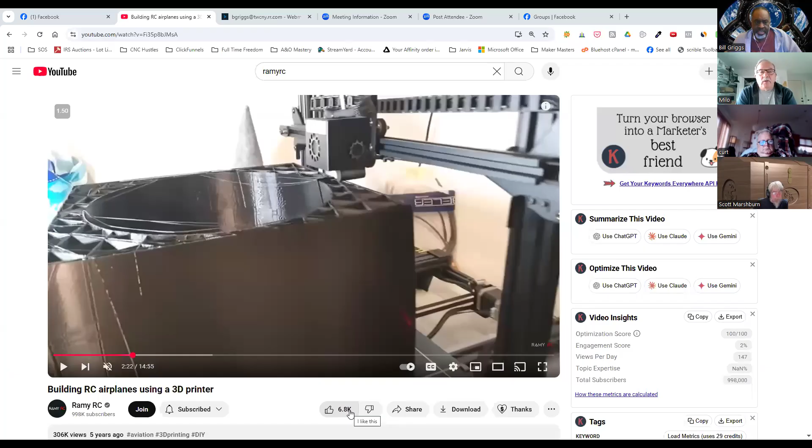This is a guy whose videos I really enjoy watching. This one is from a few years ago when he first started doing this. Can you see the screen? Yes, I can see it.

So he's using a 3D printer. We don't need to listen to this part, I sped it up, by the way.

So what he's printing is a mold for a nose cone of a jet.

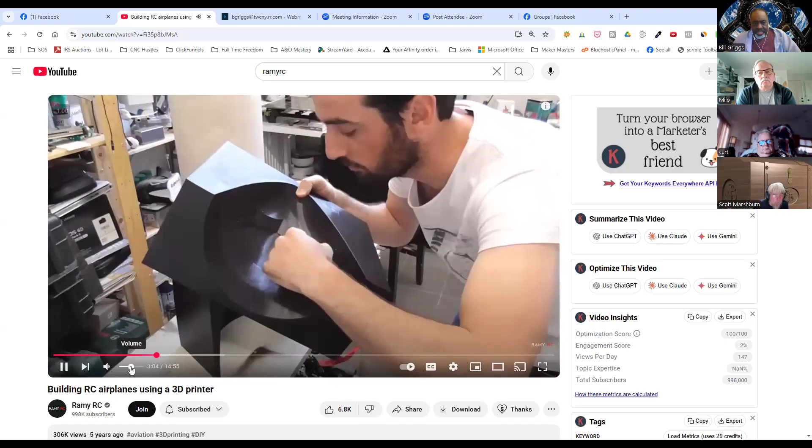So now I have the two pieces, the first one, and this is the nose. As you can see in the windows here, we have some work to do. I have to add some filler and sanding, because we only had a 2-dimensional picture, and it was really hard to construct, especially the windows, because the front two windows are straight, not curved with the fuselage, except the one on the sides. My friend Ralph really did his best, and they look amazing. He got the exact shape, but he couldn't avoid these because they're really hard to do.

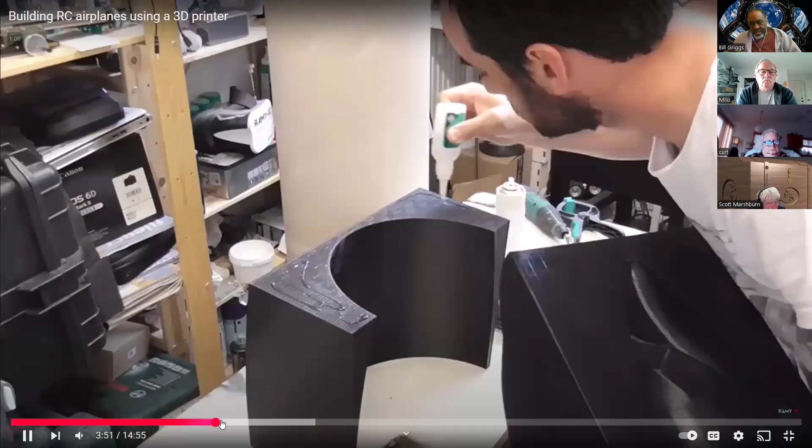So we thought we could do some filler work here. I'm going to go forward to where he gets further along in the process, and then a little further.

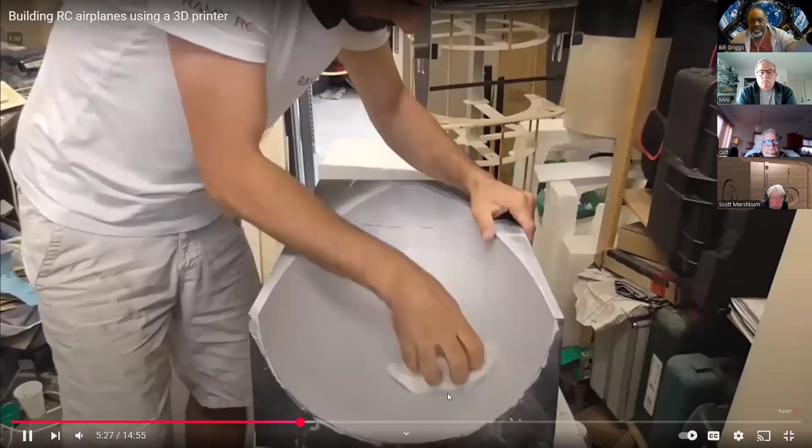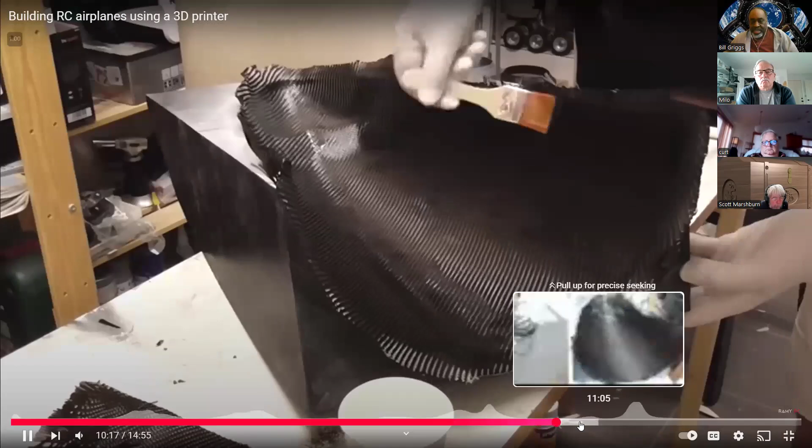So he gets to the point where he's got a fiberglass mold. We've all seen people make things like Corvette body replacements with a fiberglass mold, but this is what he did with his 3D printer on a large scale. After he got the mold prepared normally, he laid in carbon fiber and resin and built it up a bit at a time, with more layers and more resin.

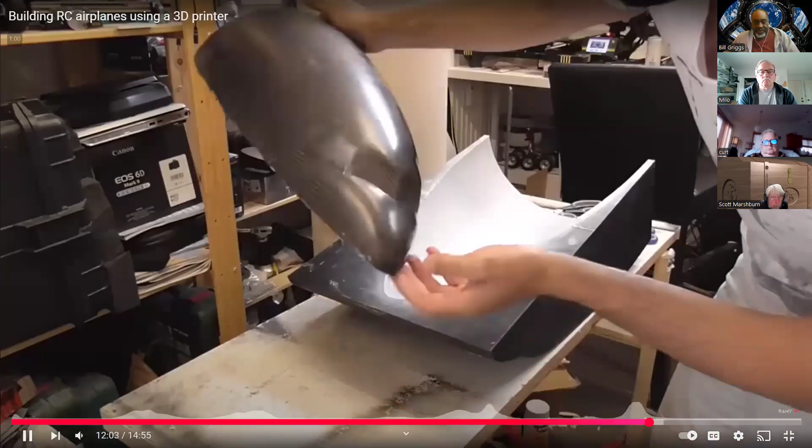Anyway, this is the simple way. I think it's hard to do, but I think it turned out good. There's a finished top portion. Thanks again for something, Banggood, for sending me this 3D printer. It really is very good, I'm very happy with it. So for my next project...

Anyway, that's one example. This guy made that video five years ago when he first started; that was the first thing he ever molded.

And I'm going to show you what he's up to today, if you don't mind. Absolutely.

This was the latest thing he used 3D printing, etc., for.

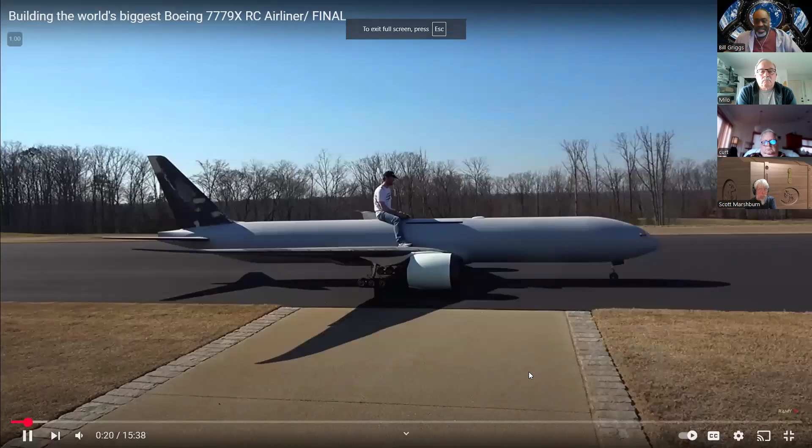Oh, jeez. Now let's see him actually lift off. I'm not sure it's got quite that much power, but...

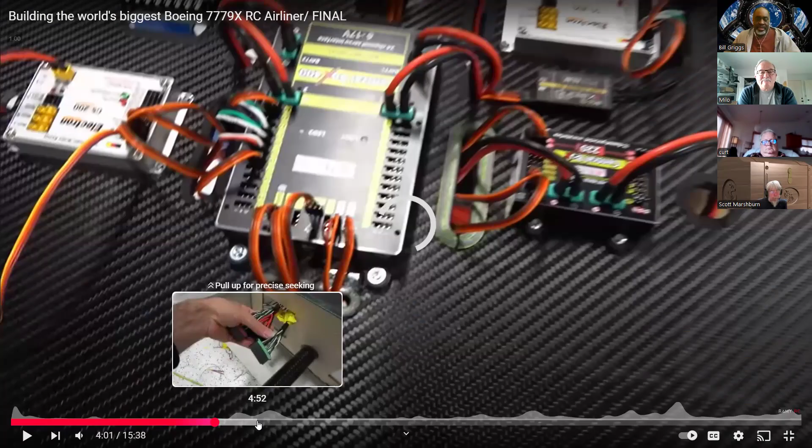So he built this for Tyler Perry, the actor and director with a massive studio down in Atlanta that does all sorts of things. Anyway, there are pictures of him putting in the electronics to this thing, and all sorts of things. There's like 5 or 6 series where he's going through how he installed the landing gear, how he did everything on this gigundo plane. And it's all from techniques that he learned.

Oh yeah, you got to see this coming out the door. Let's see, where is it? Right about here. He had to take off the wingtips to get this out of the barn door. Wow, where they built this thing. But there in the back, I see it's not his first.

No, Tyler has had this guy building planes for him for like the last 2 years, and this is just the latest one. This is the 777-9X Dreamliner, I believe they call it. Let me see if he's about to fly it.

Yeah, all right, I'm gonna just let the video play for a few more seconds. Is amazing. The brakes are amazing and the landing gear is great. Honestly, we're so proud of this. Just seeing it doing that turn on the runway. Unfortunately the turn radius is not so much, but seeing it turning, it looks so scaled. The next and final step is for it to fly good, and yeah, fingers crossed.

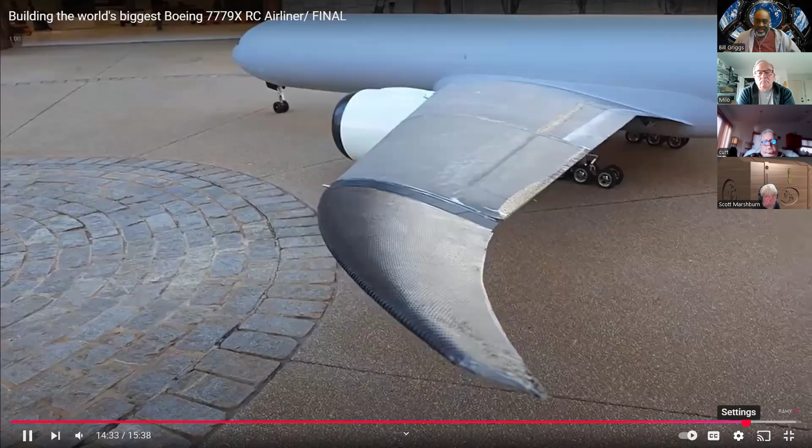The excitement is building up day after day, especially when it comes to programming and wiring and just putting it together for the first time. I lose sleep over that. Anyways, there is still a lot to do on this plane. Like, we made everything ready for it to fly, but there are still so many small details. There are no lights on it. There are a lot of small things that we will work on, but after the maiden flight.

So we are hoping to get it ready by tomorrow for the maiden flight. And so wish us luck. Tyler is getting ready as well to fly this thing because he is the pilot. We did our job and the rest is on him. So no pressure, but I know that he got it just like any other plane. And so stay tuned, wish us luck again, and we'll see you guys very soon, hopefully next week.

All right, now I just wanted to make it clear, Tyler Perry, at his estate, those two buildings that we just saw, those are his RC buildings. The big hangar, that runway, that's his private runway for his models. He's got another spot where he takes off his full scale helicopter where he's in it, etc. But his place looks like Versailles.

The long, the big gardens, the whole 9 yards. And he's got this guy building him, not just that guy, but several modelers. He doesn't have the time to do it himself anymore, but he does have the money to have it done by the best modelers in the world. Wow. There's another video where they show the CNC router that was used to make the fuselage sections, and if I can find that, I'll show that because it's related.

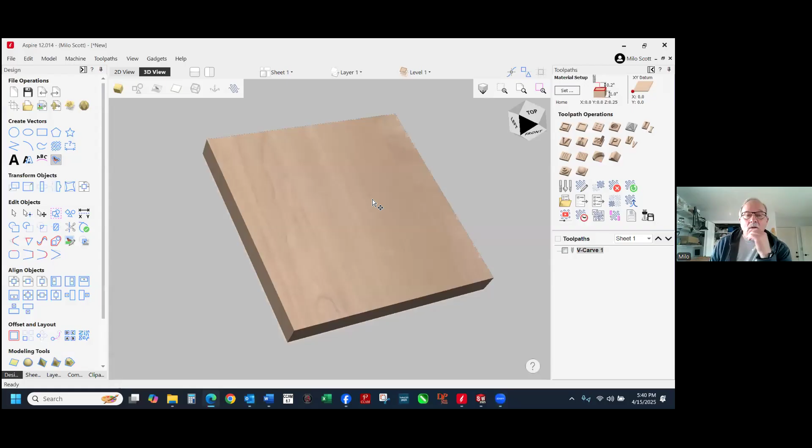Okay, let's take this off over to here. Let's get rid of all this crap I was playing around with earlier. We'll start with a fresh start.

Okay, 10 by 10. And we'll put, let's do a 5 by 5 square in the middle.

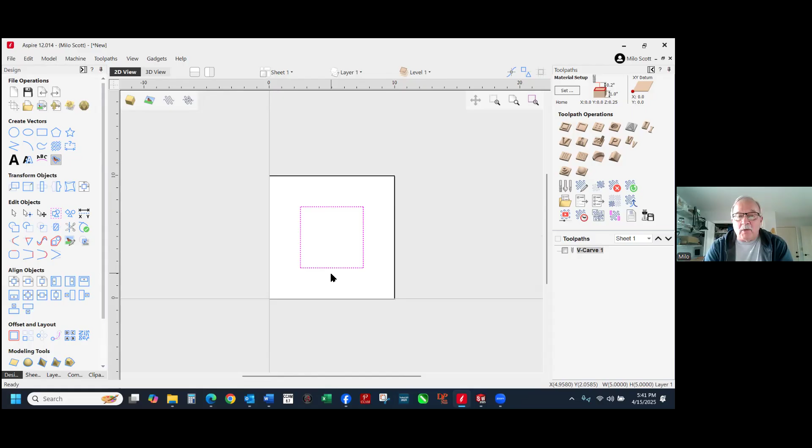Now here you either have to have a pre-made model, because they calculate the cubic inch of a 3D object. So if you're in VCarve, if you import a model, you can calculate the cubic inches of that. In Aspire, of course, you can make your own models, and so you can create whatever you want.

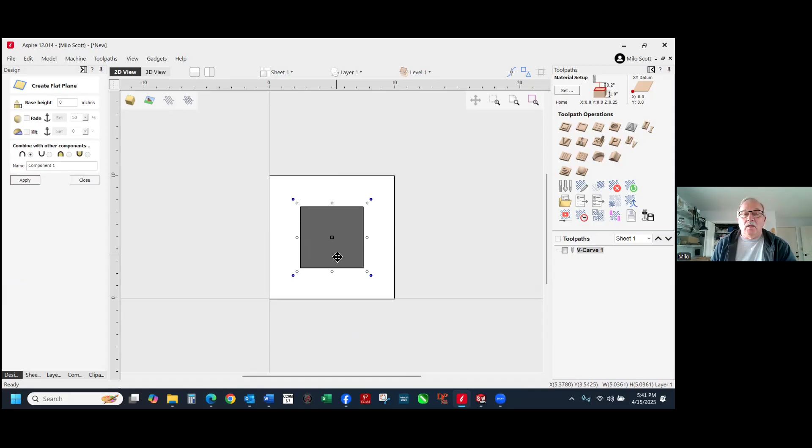If you do a flat plane model here, let's go 1 inch for ease of calculation. So 5 by 5 by 1 would be, what, 25 cubic inches. If you... let's get you guys dragged out of the way here.

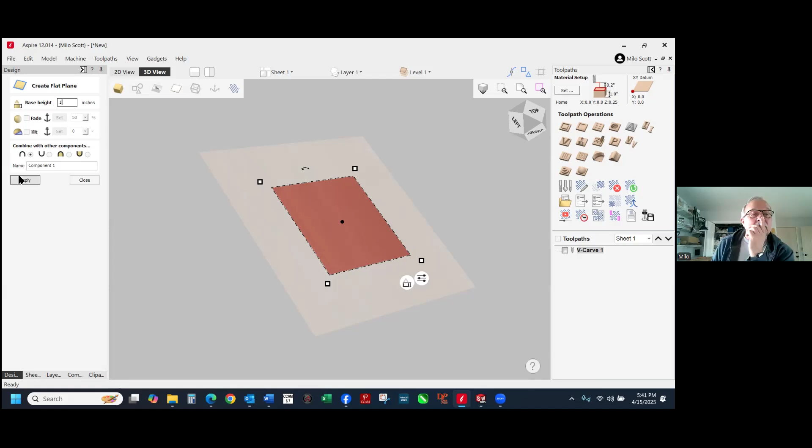Control Shift Alt V. Oops, apply. Oh, base height, I'm sorry, 1 inch. Apply. There we go.

And if you click this, Control Shift Alt V, there it's at 24.85 cubic inches. Pretty amazing.

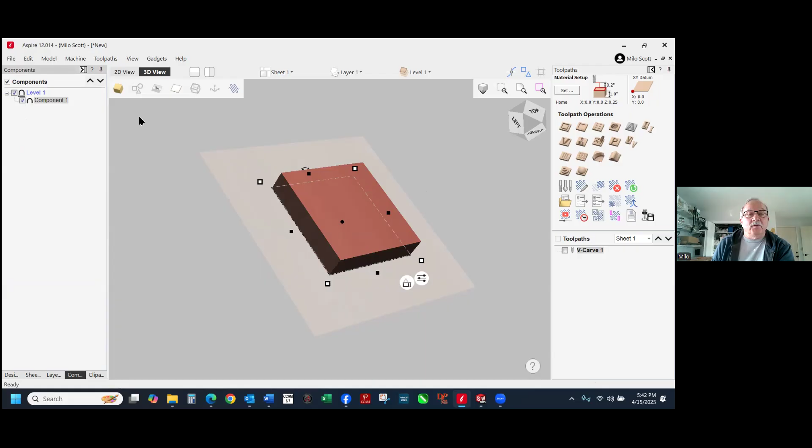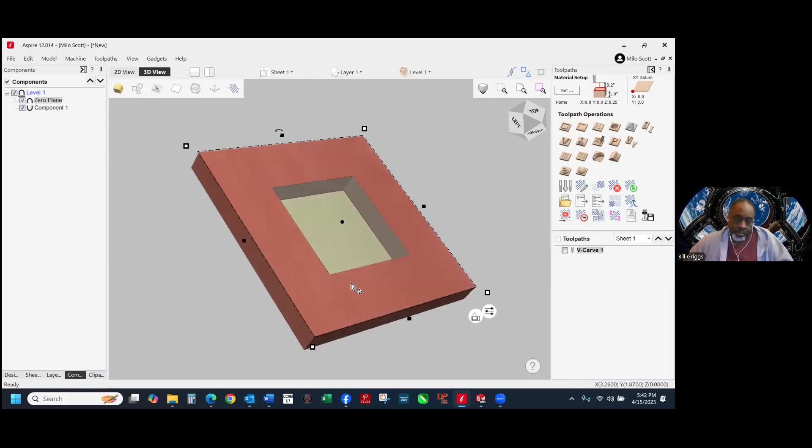Now if we make this a subtract, we'll do a zero plane on here, create a component. Add a zero plane, so you get it caught in here. Control Shift Alt V, and so you got your negative. That's all there really is to it.

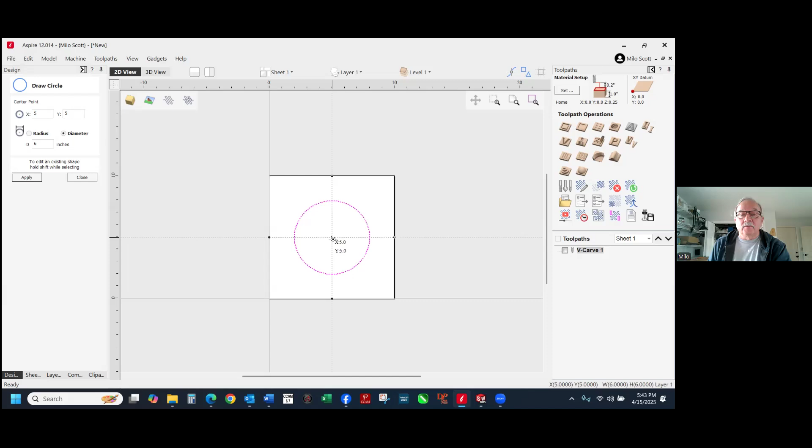Now if you get a little more application here, let's take and put in about a 6-inch circle, and let's put some text on here.

And let's create this on an arc. Oops, I clicked something too many times here, back up. There we go. I think I hit the wrong button. Text on the other side.

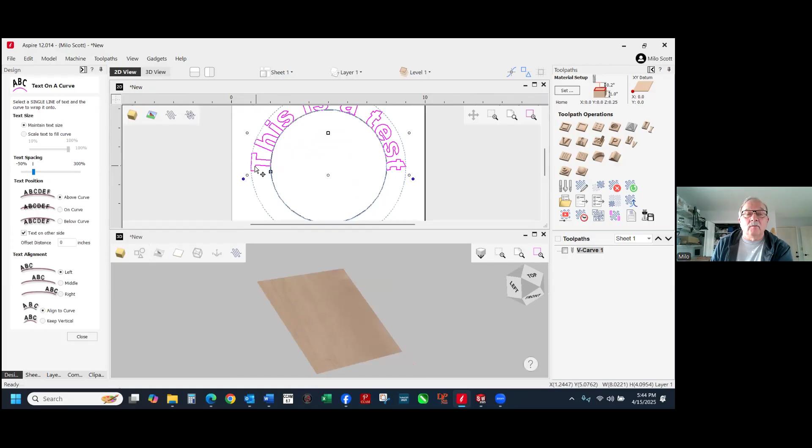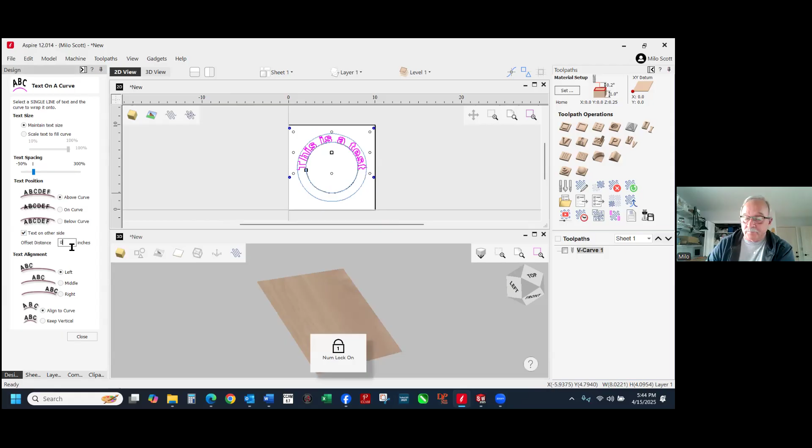Let's go here and take about a 3/8 of an inch offset on that. I'm clicking too fast here, it's a live demonstration bias. Trying to offset that, I thought I could do this here, 0.3 - oh, my num lock must be off. I get it.

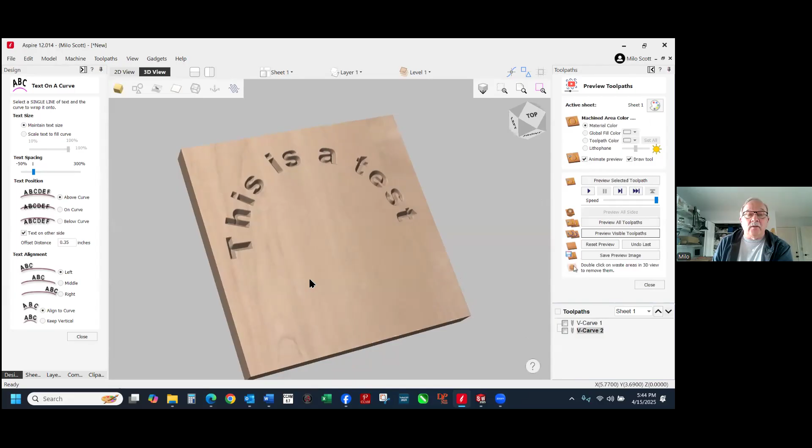Okay, now let's take and do a V-carve on that. Preview that. Now, this is not a 3D model, this is just a preview, so you cannot measure the volume.

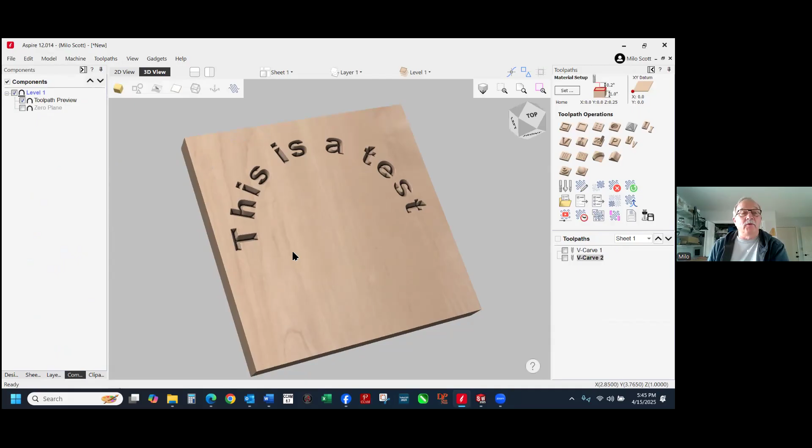So if you come up here and create a component from the toolpath preview, now you have a 3D model of your toolpath preview. So now if you click that with Control Shift Alt V, this thing is saying it's 99.5 cubic inches - it's measuring the whole thing, minus whatever this is.

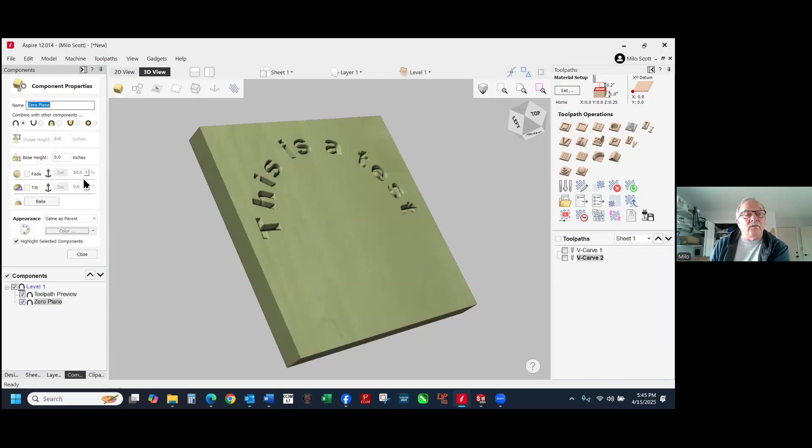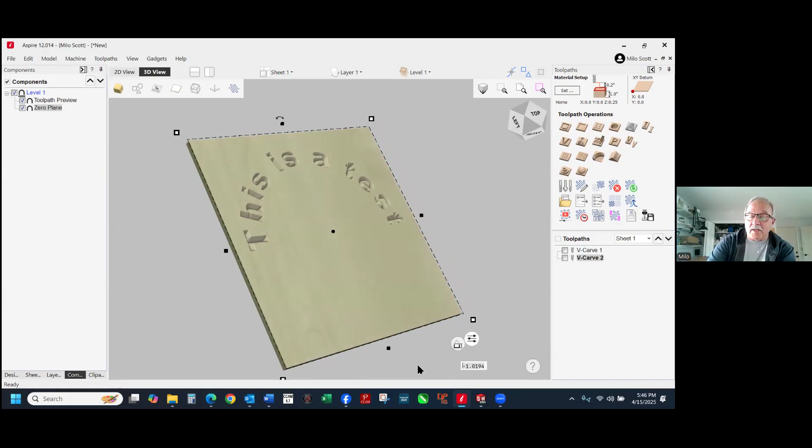Well, you don't want to think that hard. So if you use a zero plane - the trick is you have to adjust the height of the zero plane to the surface. As you change this, there you see that slight coloration difference? Since the model was 1 inch on the text, do a -1 inch on the zero plane. Now when you zoom in, you'll see this zero plane is right at the surface of this model.

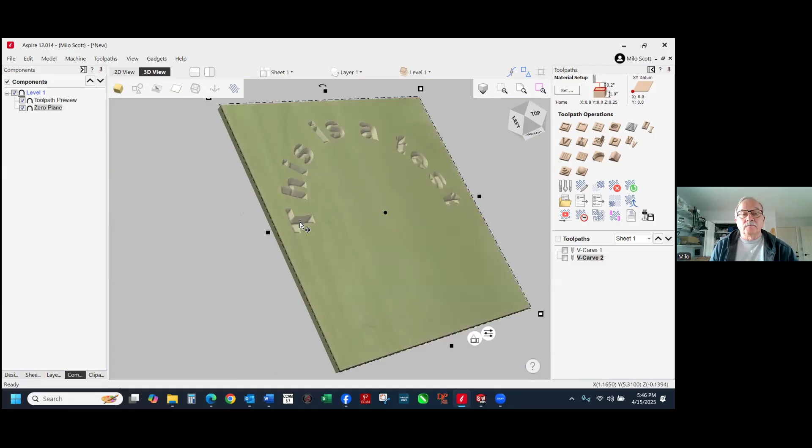Now when you do Control Shift Alt V - oops, Control Z, come on. Click once, Control Shift Alt V. You got minus 0.4 cubic inches to fill up those letters.

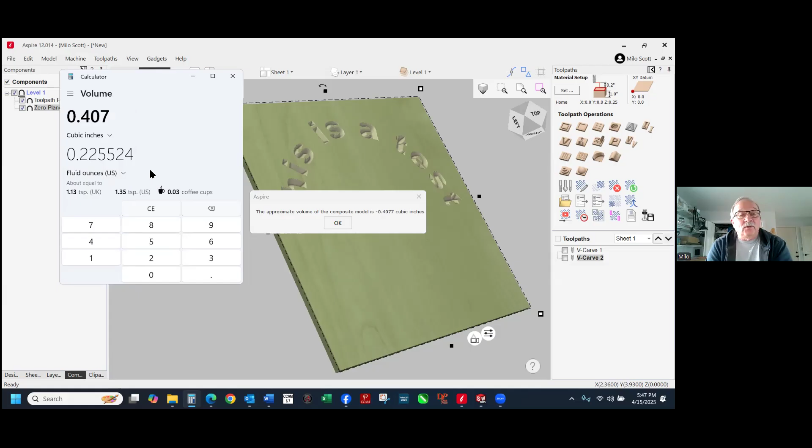So you'd make a half ounce of epoxy. And if you want to do the math for cubic inches, right here in the Windows calculator, they have a volume calculator in there. We'll go cubic - where the heck are you - cubic inches. You can go to teaspoons if you want. So you just type in your 0.407, and it's 1.35 teaspoons. Or you can do fluid ounces - let's go here to fluid ounces. So a quarter of an ounce would fill that up.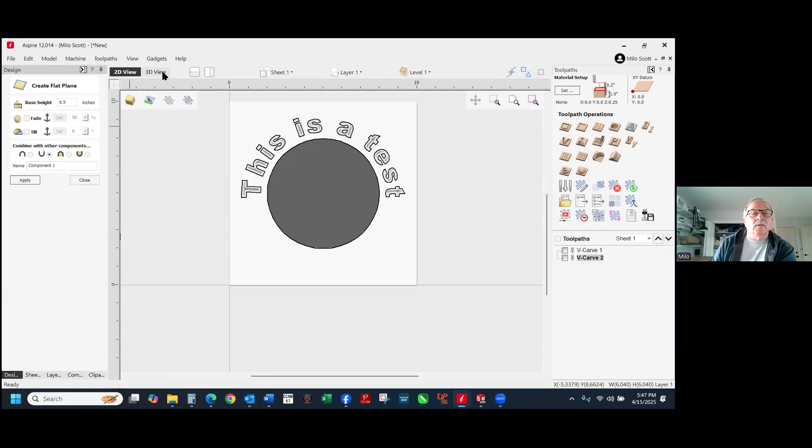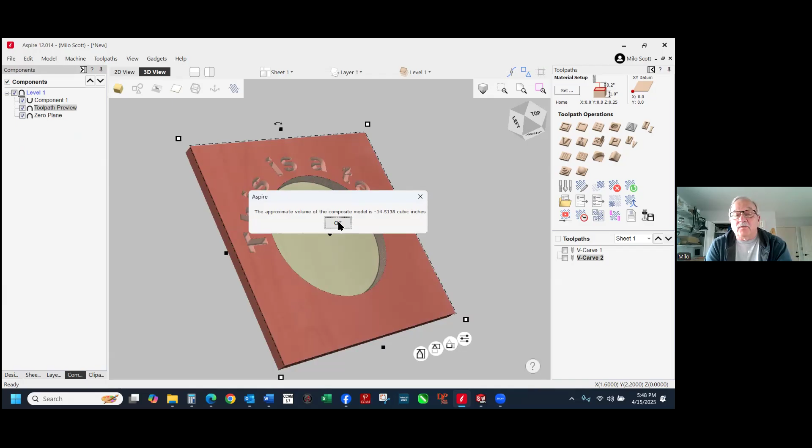Now, if we come back here and add a little more to this, since you already have a 3D model of the letters, you can just create a - let's go half an inch - and we'll subtract it. Now let's bring this up and apply that, and then we'll close it. Now when we take and Control Shift Alt V, now we're up to 14.5 cubic inches to fill that void along with the letters.

And if that's all you wanted to do, there we'll go - 14.5138. So you got about 8 ounces, or about a cup.

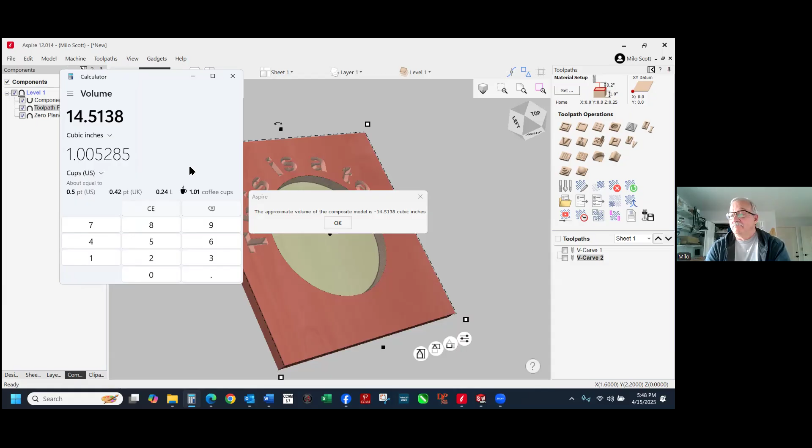You know, the guys that do this every day, they've got the advantage. They know just through experience. Well, shoot, I don't do it enough to have any kind of a feel for it.

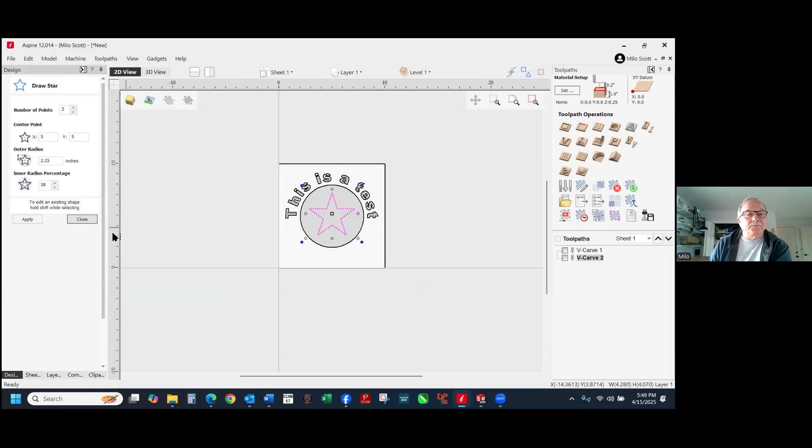If you add a little more here, let's put an image in there. And let's put in about 3/8 of an inch here. So it'll be a little bit - we did a 1/2 inch deep void, we'll do a 3/8 inch star.

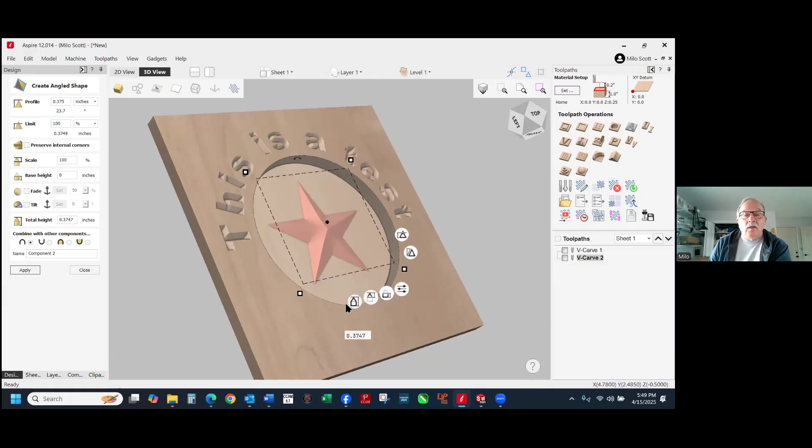And on these things, if you haven't done this very much, you can see where the star has a little bit of a sway back. That's component number 2. You preserve the internal corners. Now you got a nice shaped star.

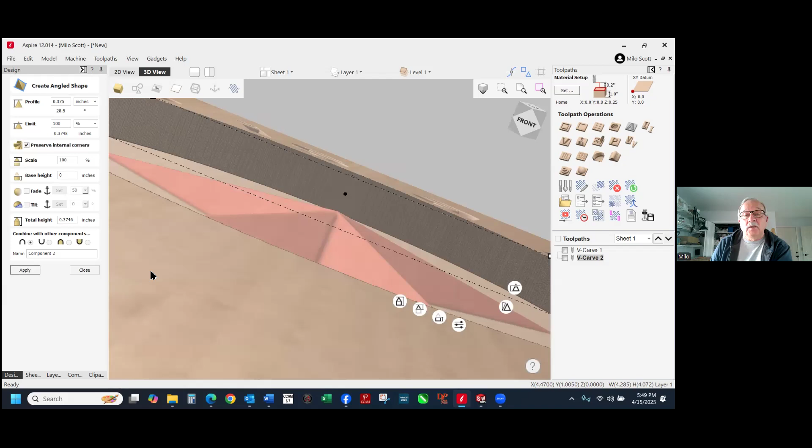Control Shift Alt V. Now it's taken out the material that filled in and readjusted the total cubic inches now of the complete piece.

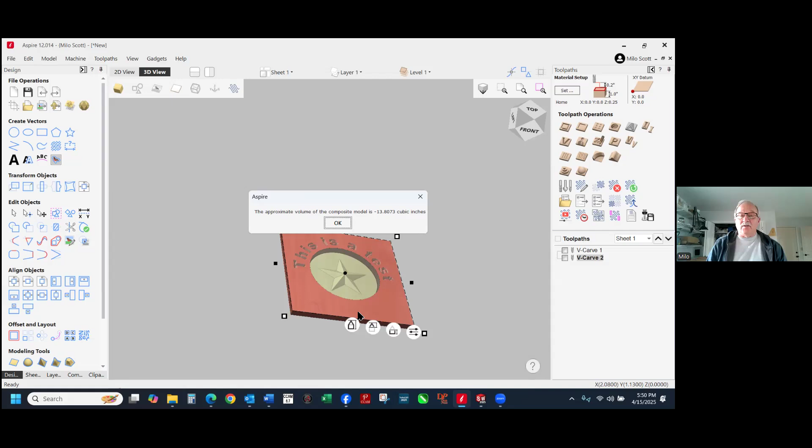I thought that's a pretty slick little deal, having been doing this for 3 years now. And for everybody doing resin inlays, this is totally valuable. Same thing if you were pouring a mold, like we were talking about with sand casting — limited as it could be to this type of application, or if I wanted to cast letters and then later inlay them into this surface, now I know how much pewter I'm going to need to melt down to pour those things. I thought it was pretty slick when I stumbled across this.

Kurt just put something in the comments about different units of measure. Let's see what we got. Oh yeah, I've seen that before, Kurt.

I only saw that less than a couple weeks ago, because I was working with someone doing everything in metric, and my brain doesn't convert metric to inches with ease. Neither do I — save my voice, Kurt, read it to him or talk about it. Essentially, if you import a product listed in metric and want to work in imperial, go into the dimension box, either width or height, put your cursor to the farthest right of the numbers, type in asterisk I equals, and it'll instantly convert it to imperial.

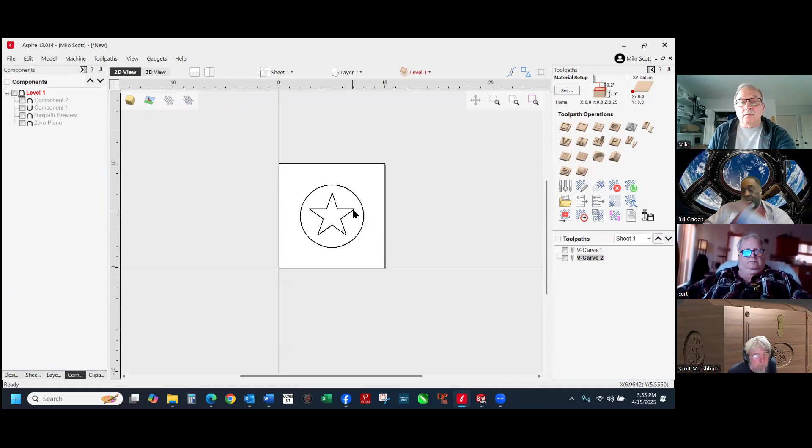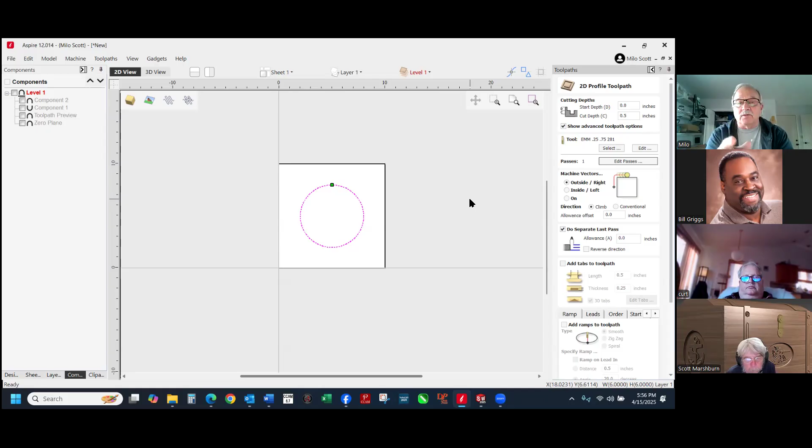Let's clean this up a little bit and shut all that off. If you cut this with a profile, and let's say it's only half an inch deep, and I want to do that with a single pass, and then say I'd like to do a last pass to clean up when the bit enters — it'll have a vertical line there, and as it relaxes from spinning, it'll leave a registration mark. Or if you want to do just a last pass with about 6 or 10 thousandths to come inside, let's do something big here so it's easy to see. Let's go back over here and finish this up.

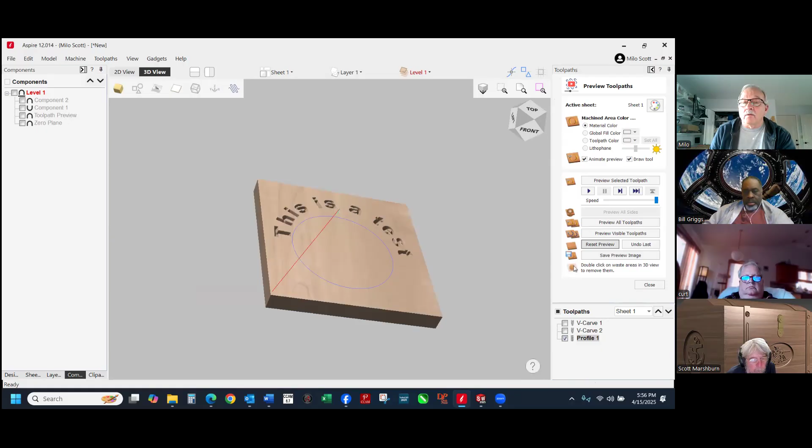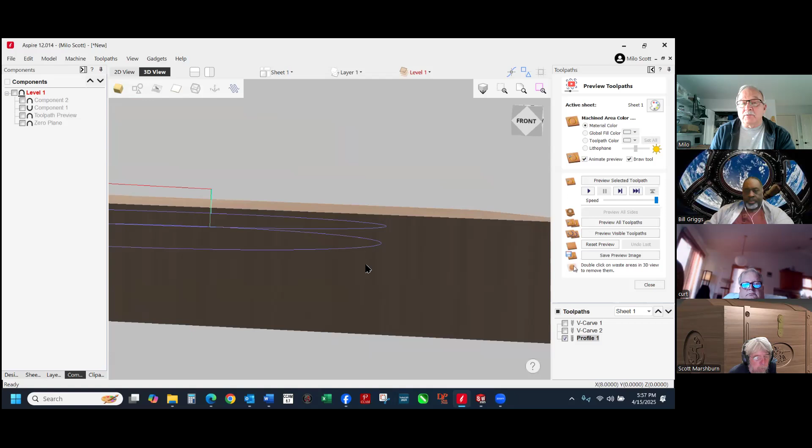Reset. Even though I selected a last pass, it doesn't do it, with a single pass. Now if you have two passes, there is your last pass. It moved inside on the last pass to cut it. You have to have more than one pass in order to get this last pass. Yep, because it uses... when I sent this up to Vectric, I thought it was a mistake.

Because I said, hey, more and more people are doing a full depth cut, but they want to have a final cleanup pass where it's just skimming the side to get rid of any chatter that may have been there, so that the bit isn't bouncing off the walls. And they said, well, we said it was a separate last pass. I go, yeah, and well, that means you have to have more than one.

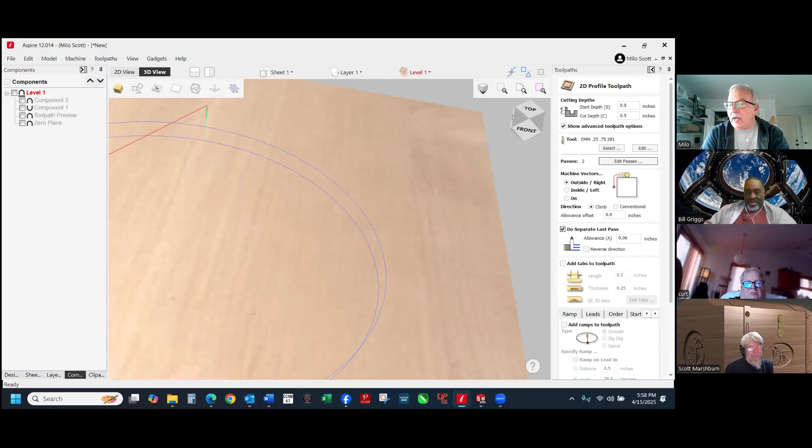I go, okay, I would have never in my lifetime gotten that out of that verbiage. And I said, in the help file, it does not state that you have to have more than one pass. So just my recommendation from somebody who doesn't know the King's English is that that's not very helpful. Made perfect sense to the programmer, but not to the user.

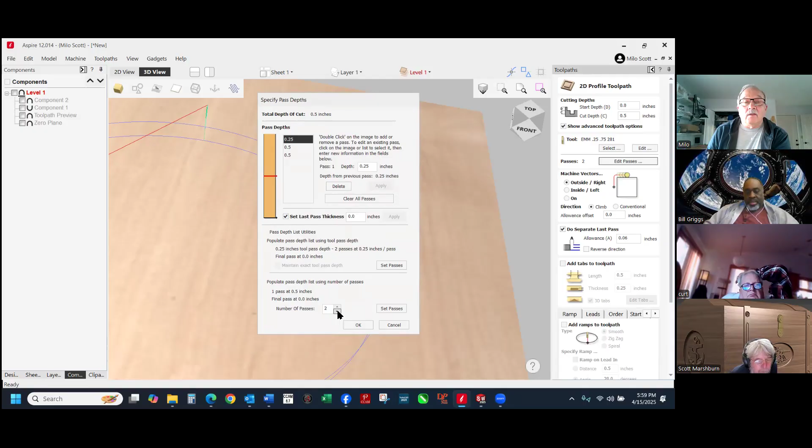Well, what I have also found is right here, oops, let me show you how I got there. This is edit passes. This is set last pass thickness. You go a whole bunch of zeros and a one, and you reduce this down to one pass. You'll see here where it says a half an inch and a half an inch. There's two passes there, even though I have it down here as one. This one here sets another one.

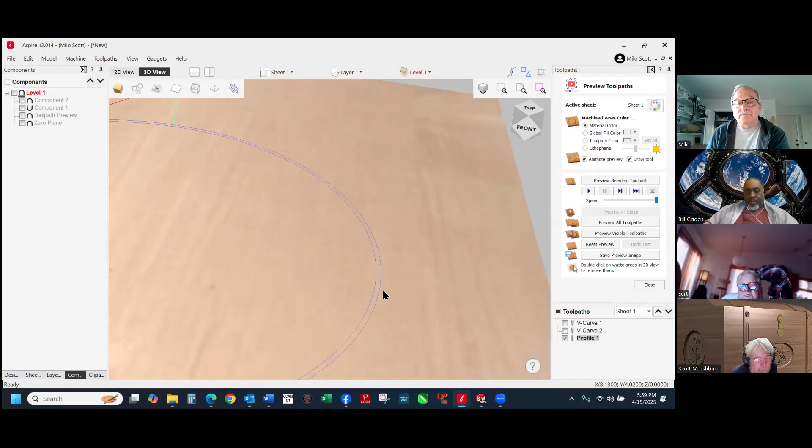So you end up with three? No, well, I only took it down to one. Okay, but now here you see where I do have a last pass. They're at the same depth in all practical terms. And so now you'll have a single pass go around and then another one to clean it up as it comes inside.

Okay. Yeah, we call them finish passes or spring passes. What version is this? This is 12. And I think it's been the same thing for quite a while. Yeah, I was just looking in 10, and looking for it in 10.

I'm doing it, I'm looking in 2D profile toolpath. And I don't see... oh, the last pass? How about advanced options? Because I think when you take the advanced options check mark off, it doesn't show you the last pass. I'm pretty sure it was in 11 at least.

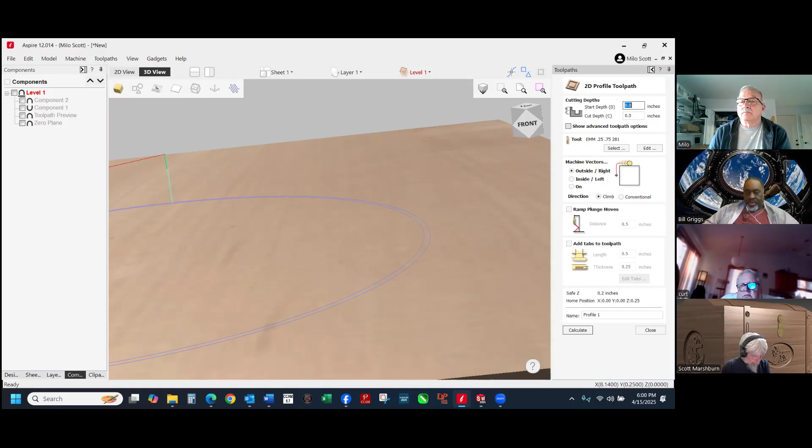Okay, I'm looking in toolpath, 2D profile toolpath, and I don't even see the option to click. You want to share your screen? We can. Oh, there it is. There it is, show advanced. Okay, now I got it. Thank you.

Yeah, that separate last pass setting snuck up on me because I was cutting with an 1/8 inch bit down through 7/8 inch hard maple, and I was getting a lot of bit chatter as I was going down through there. I thought, okay, I'll clean up with the last pass.

Well, if you have multiple passes, it takes the last pass depth and moves in. So that last 1/8 of an inch, let's say, it would take that last 1/8 of an inch and move in. It didn't go all the way down and then move over to take a full wall cut. So if you're taking 1/4 inch passes on 3/4 inch material, it'll do 1/2 an inch, move in, and then the last 1/4 inch around. And then you still leave a tool registration mark just on the lower portion of it. What I was after was trying to do the entire depth, one last skim pass to clean it up.

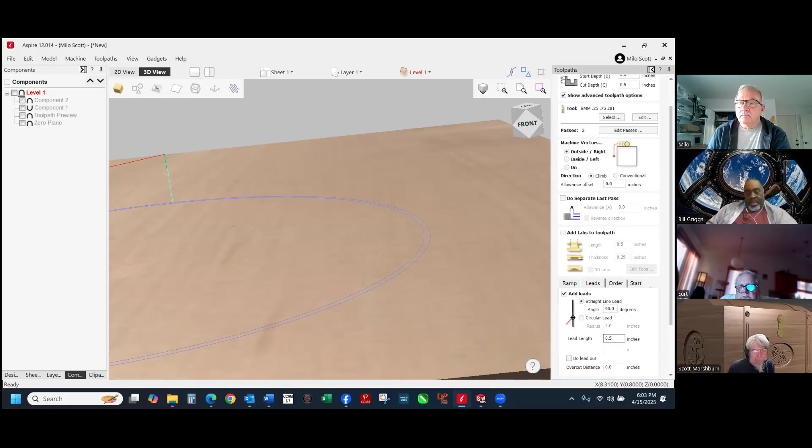I brought this up to Vectric here a while ago. Let's see, where are we at? Oh, leads down here. Lead out. That should take care of it, I think. Let's do a really big one. Would you really want your lead out to go outside like that?

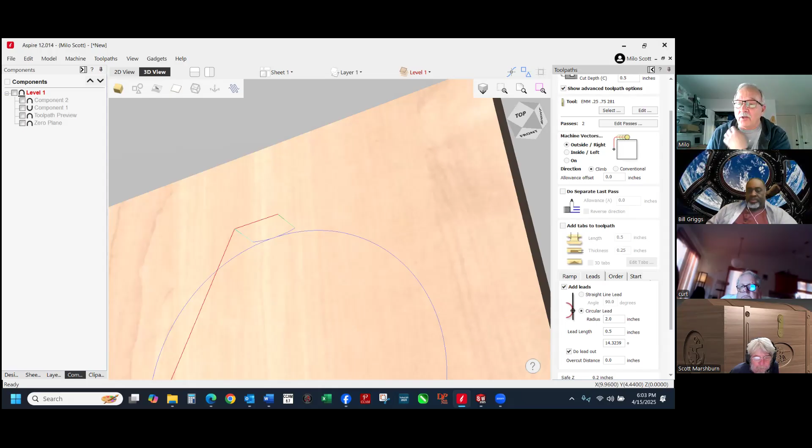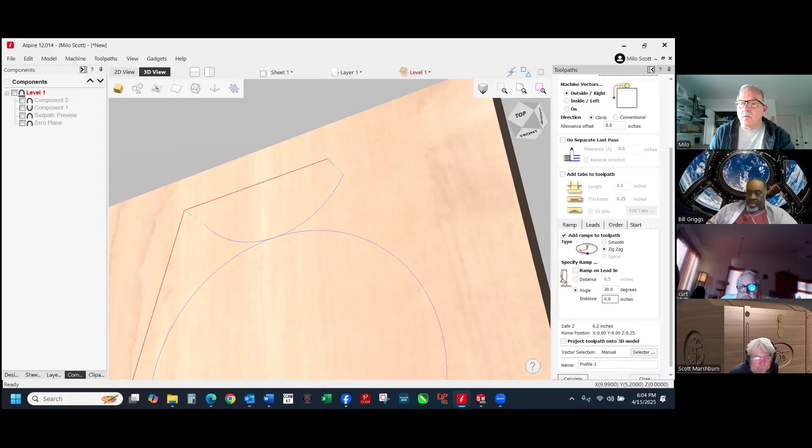Well, let's say you wanted to keep the inside, and you had tabs in here to keep it from falling apart. Okay, but let's do a long one so we can see it better, and let's do multiple passes here so we can see it. You see here, it does what you would expect, all the way down. If you put in a separate last pass, and we'll reverse the direction even...

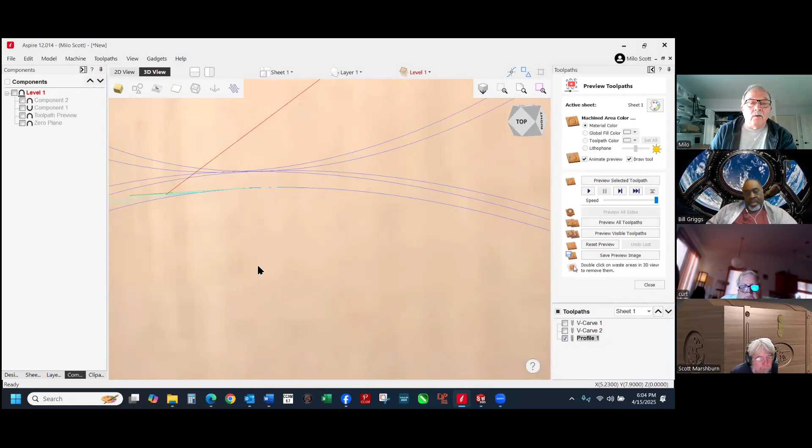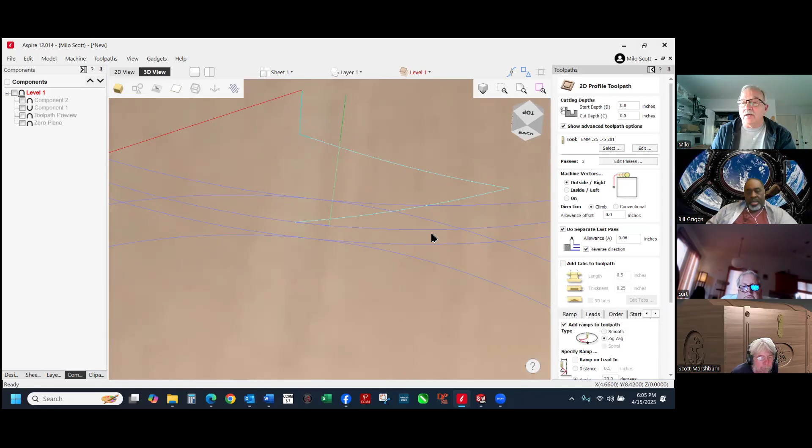Here are your lead ins for starting off and then coming in. But this last pass moves in and comes down and does your ramp on the piece. So whatever you tried to get away from, you put right back in there again when you did a last pass. Let's take these ramps out because that makes it harder to see.

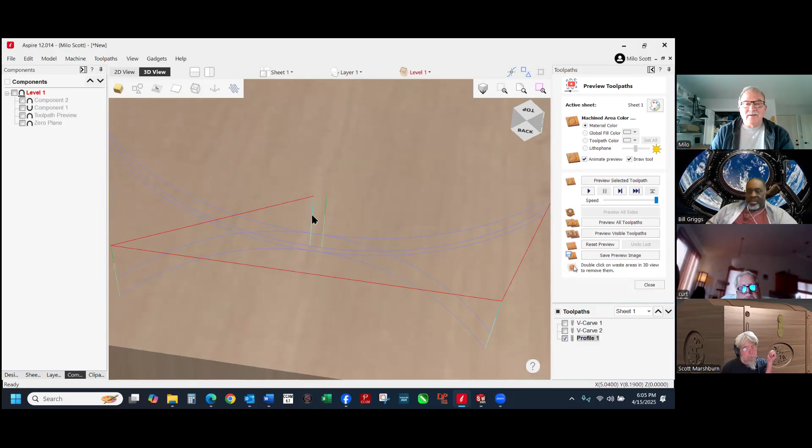So now on that last pass, you've got the bit coming down the side of the part, and you leave that bit registration mark in there while trying to keep it away from it by doing the lead in and lead out. When I asked Vectric about that, I said, is this intentional? I can't see how it could be. But they looked at me funny and said, no, take a look. The last pass does not do a lead in, which kind of defeats the purpose.

They'll fix it in 12.5... 13, 14. So the last pass is only going to be about 3 or 4 thousandths, isn't it? Yeah, but you still see the line. So it comes straight in and then goes. It doesn't roll ramp in.

Those inserts that I've been messing with that I've shown you guys before, it was leaving a doggone registration mark on there, plus all the bit chatter. So I went in there and finally made my own last pass with a lead in and lead out vector. And then I can also control the overlap that way as well. If you can't beat them one way, do it another.

One of the tool paths that I was always wanting, especially when I started doing aluminum, was the helix plunge.

So you don't break the bit, you just take a little bit in the ramp. You can't really do that with the ramp command very well because they've got zigzag ramp, but they don't really have... oh, they got a spiral now. Oh yeah, okay, it's been a while since I've been out at the machine.

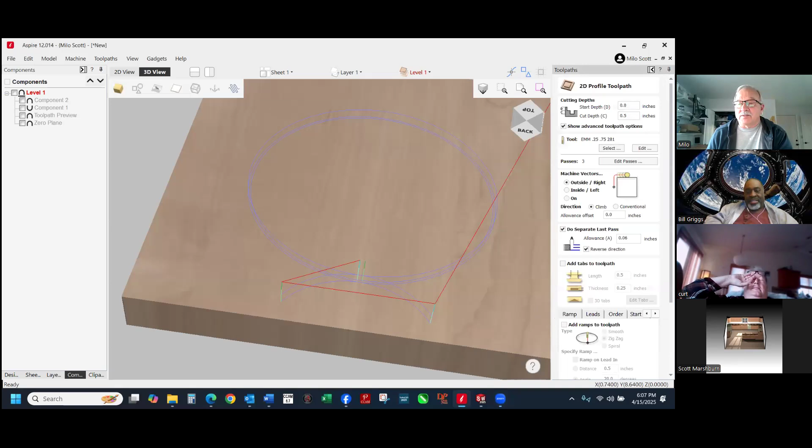Let's take these ramps off of here. The only reason I am aware is because I use it a lot. Just take the last pass off right here, this spiral.

I was also cutting internal threads before they put the threading toolpath on there. Here you can see it swinging around, and then one last pass. Before they did the threading toolpath, I would take and change the pass depth here to the thread pitch I was after. But yeah, this does a nice job.

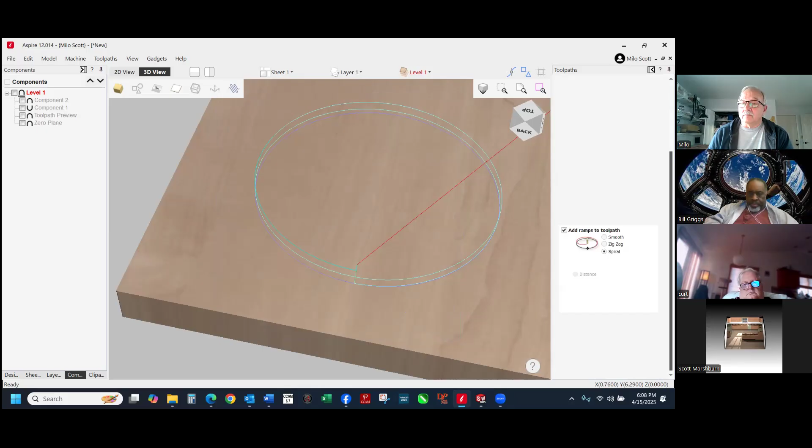How can you set it? This here is set by the pass depth. So if you set it to 0.06 and we're going a half an inch deep... this is also how I do test cuts on a machine when I'm doing a calibration, setting the acceleration and deceleration rates and the transitions.

If you get a really tight spiral, like a quarter inch hole with a slightly smaller bit, it'll either shake itself to death or it'll do a nice controlled descent. This is how I set that up for that type of test.

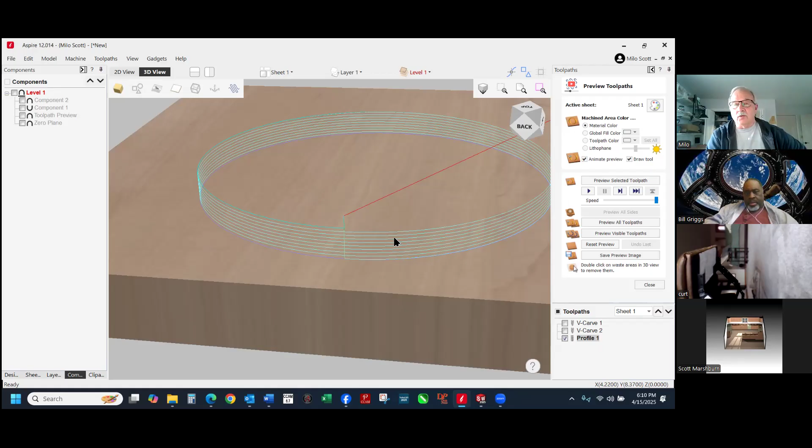Back in 2018, I think, or '19, at the Chicago user group, they had mentioned where they put in a vertical helical arc to where you can get G2s and G3s vertically, where it used to be only G1s, short straight line segments. Now a lot of the post processors have this, it will cut as quarter arcs and gives a much smoother cut going down. The machine doesn't try to shake itself.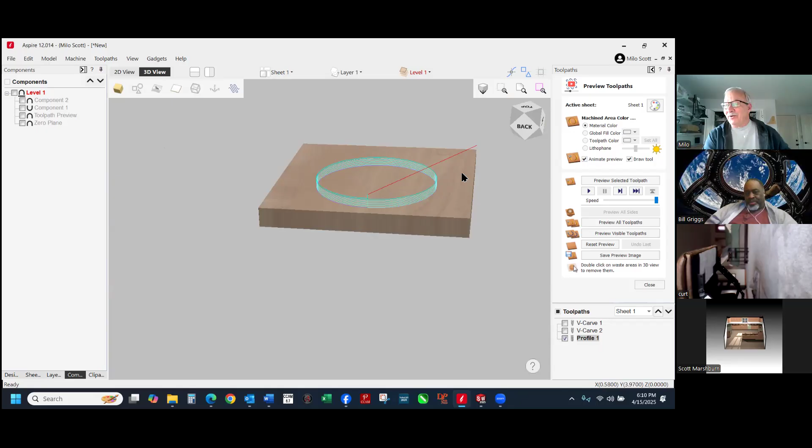Well, good. I haven't used that feature in a while, so it's nice to know that they continue the development. They, like a lot of companies, the people that write it are the worst ones to advertise the improvement. Then you go, well, yeah, everybody knows that.

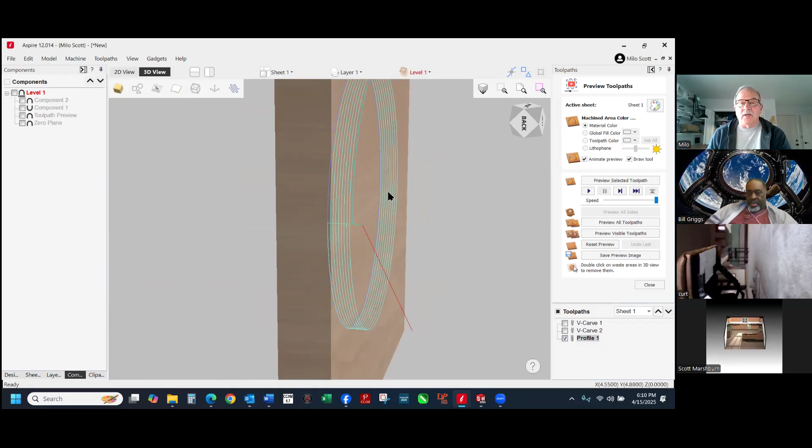Because I'm waiting for them to put in a horizontal helical toolpath. Right now, if I do this on the rotary, it's all G1s, not quarter arcs. And again, it'd be for smoothness of cut. Because I asked them about it and they said, why would you want that? And I said, well, why would you want this flat? And they said, okay, fair enough. I said, the same reason I would want this, I would want it on a rotary.

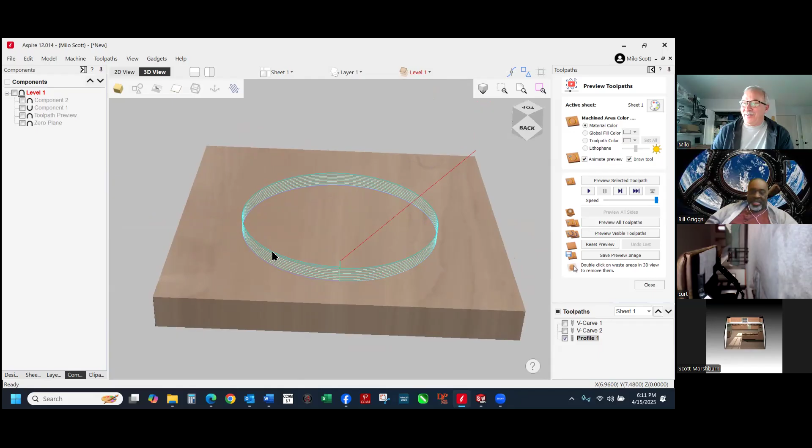Well, we'll consider that for future enhancement. I think that's the normal response.

Well, you are definitely a power user. I used to be. I don't have nearly as many use cases as you do. Once I got into production work, you didn't use as much of it. Yeah, but when it was creative, oh my goodness, I was like, 'Oh, look what I can do!' Just experimenting because you could.

And it was driving me crazy, this bit deflection testing I was doing for the bit manufacturer. We've got some tests where people are in denial that a bit will deflect, and therefore make wild cuts on your vertical walls that everybody complains about, but they blame the wrong thing. Yes, the machine is certainly to blame at times, but there are times where you can't stop it, like from the bit deflection.

So how do you clean it up? By using offsets or changing direction from a climb cut to a conventional cut, you throw the bad cut onto the waste side. Doesn't matter if you're only doing one, but I did over 400 inserts. The first 3 or 4, I said, I don't want to have to work with that problem. I want that out of my cut. It took me about 5 to go, 'Oh whoops, I should have gone the other way.' And once I had it figured out, the next 300 were just fine.

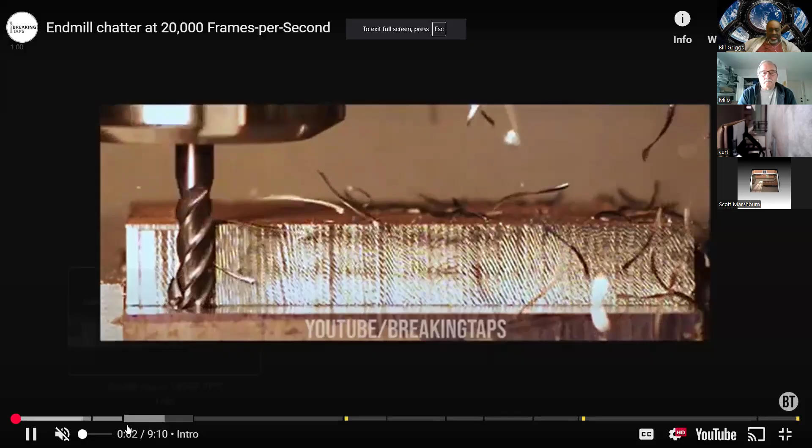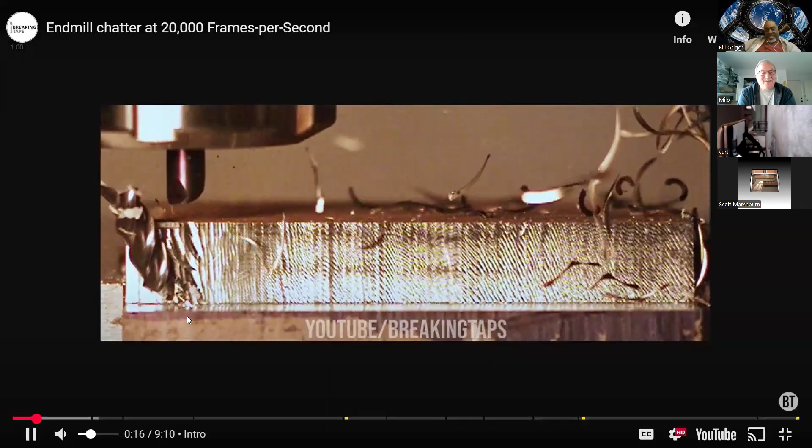Here we go. Yep, I've seen that before. If you notice, the bit is wobbling, and now the tip is gone. And oh, imagine that. Oh yeah, and you can see all the chatter marks on the side of the metal.

Let's back up a second here. If you've been around my channel for a while, you know that I've looked at chatter. This is the helix I'm talking about, using audio spectrum analysis. This is really a better, easy, low-cost way to control it. Anyway, you get the idea.

Let's see, I actually caught on video a 1/8 of an inch bit coming apart. It was in hard maple, and I was doing a spiral ramp in.

And it didn't make it halfway around. As I slowed down the video to watch it again, you could see the bit starting to deflect out further and further and further. It got halfway around, and it was sticking out there like that before it finally snapped off.

And the bit manufacturer said, 'I think I better redesign that bit, it should not have done that.' He said, boy, that's hardwood, but you weren't down very far. And the best part is, when it was spiral ramping down, you could see how far off it went from the intended path, and it wasn't that deep into the material.

There's a lot of force involved, and bits are long levers with a fixed point at the end. So it's very easy for the machine to overpower the bit and snap it.

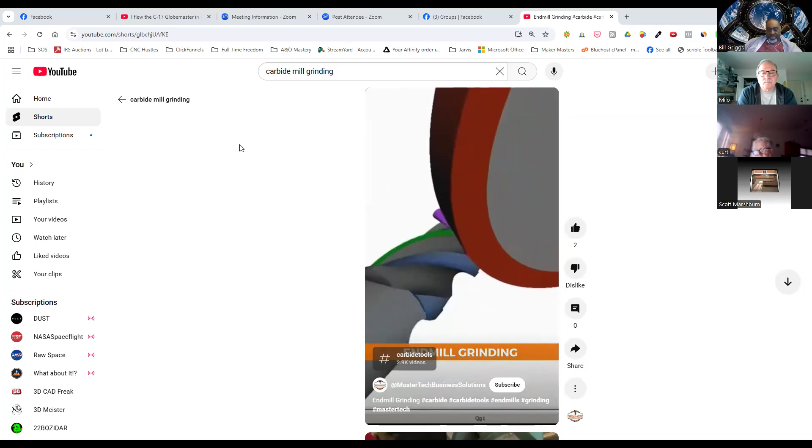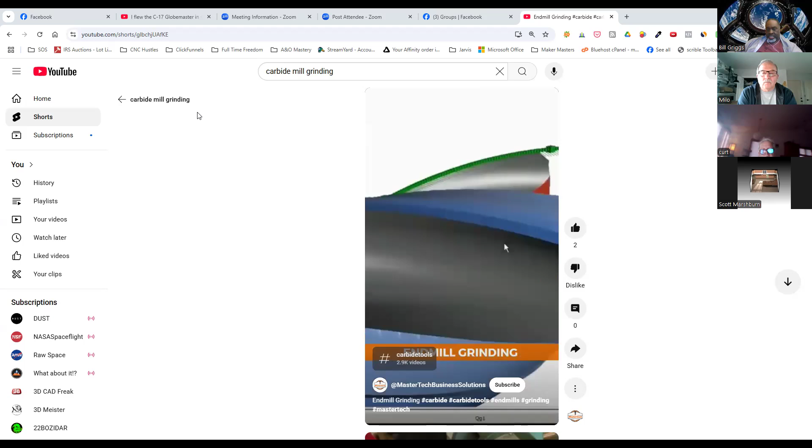Now, this has already been - the blank has already been made out of the compressed carbide, or however they're making it, before they cut it like this. But these machines are like $500,000 to $1 million grinders. I don't doubt that. They use air bearings and things like that. Well, and it kind of makes you wonder how they can sell the bits for the price they're getting for them. Well, they make thousands, or millions, tens of thousands of them.

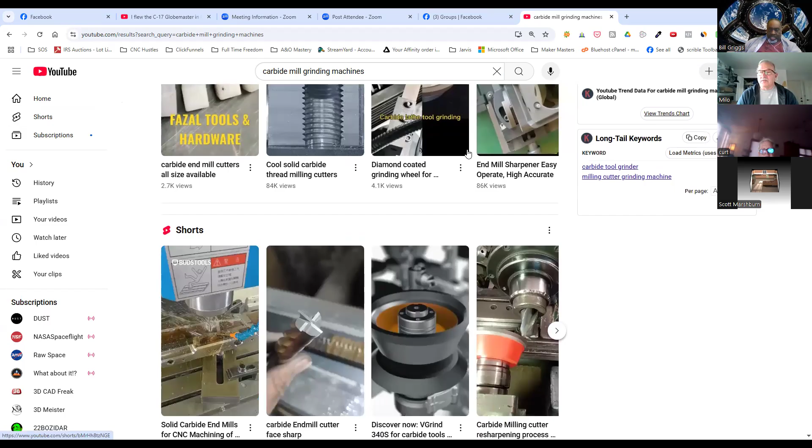I'm gonna take the search offline while we continue to talk. But probably also, I've never seen anybody yet, unless it's a really high end bit, that says it isn't worth sharpening the smaller bits. Isn't it that the smaller bits - the shank is regular steel and the last bit is soldered on? Well, some are, but the ones that I'm dealing with on this bit manufacturer, they're solid carbide. Because you drop them on the concrete once and that's about it.

Okay, I think I found one. Not sure what the volume is going to be like or whether this is worth watching, but here we go. Now I can see it.

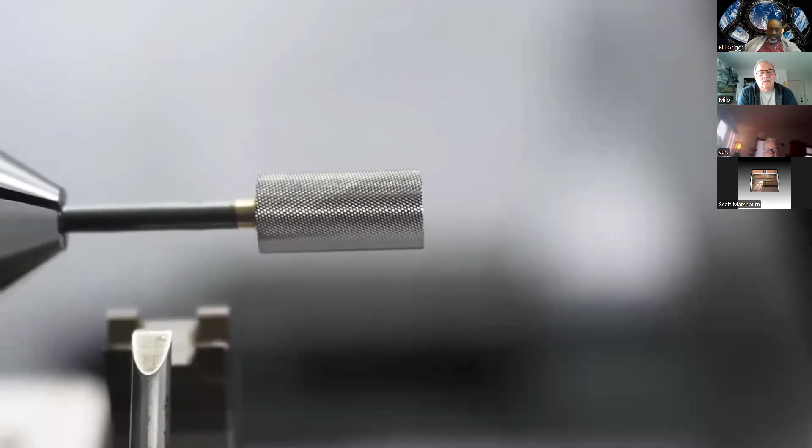That is an odd looking blank. It's like a... burr. Oh, it is. Oh, knurling. Yeah, it's a burr. Well, I thought I had it. You see where they welded it right there. Interesting to see it anyway.

If I find it in the next few seconds, you know how this is, we're doing it on the fly. Even the solid carbide bits, they may be solid carbide, but the upper shank is a little bit softer material. It might be a mixture. I don't recall exactly anymore, but they're soft enough they can actually bend, whereas closer to the end where the cutter is, they actually break. Shatter, yeah.

I know I've seen these videos before because I was curious how do they make these, what goes into it. But finding it on the fly has always been interesting.

Well, this might be it, about 18 minutes. I worked in a tool shop years and years ago where they made bits and cut bits and all that. And Don Kirshner, he's one of the beta testers for Vectric. He's down in Indiana, he's actually got a tool grinding shop where he grinds cutters.

End mill production, here we go. The Schneeberger, okay, these are the, I think they're Swiss Schneeberger, or German. I'm not sure. See if this is anything good before we look at it.

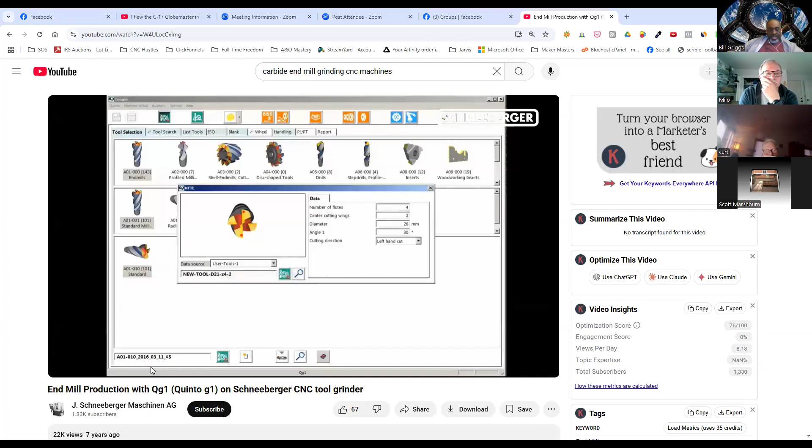Apparently there's no sound. A little bit of how they programmed it. There we go.

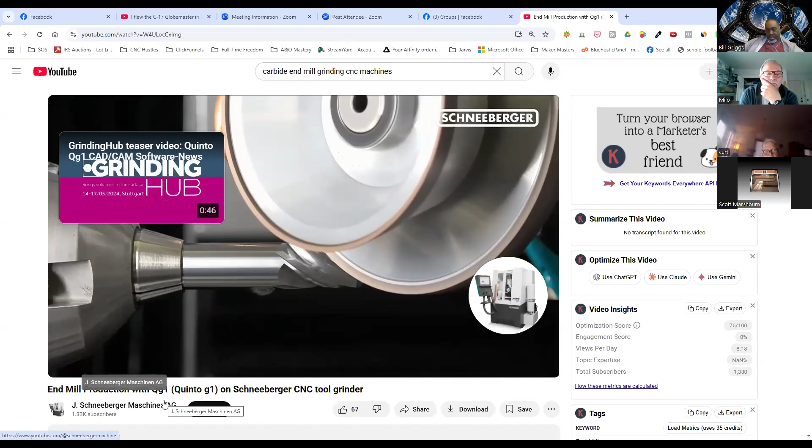Anyway, pretty wide grinding wheel. And you could probably buy a new Tesla for what those wheels cost. Just about, I'm guessing. I'm exaggerating, but yeah, they're not cheap. You really don't want to ding that wheel.

Oh, just for a quick second, there's a Tormach for sale in the auction over here. Just a little quick side note. Let me see if I can find it real quick. Well, I already own one, but if you guys are interested, feel free. Oh, it's gone, see?

Jesus, didn't last long. Yeah, that's like that laser cutter that was just down the road from me. It was a Thunderbolt laser, never used. Jeez, and by the time I decided to call, it was already gone. Yeah, then you can sit there on a machine for 6 months and never get a nibble.